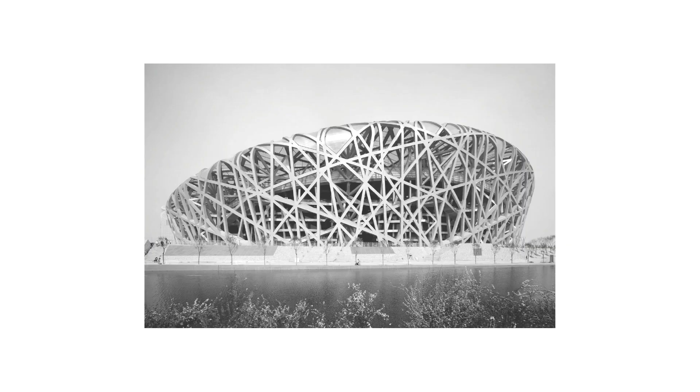2 trillion kilograms of steel are produced around the world every year, enough to construct 17,000 Bird's Nest stadiums, 31,000 Empire State Buildings, or 480,000 Guggenheim Bilbao skeletons. If all of this steel were to fill Central Park, this single ingot would be nearly 10 meters tall. If this steel were to wrap around the Earth, it would circle the equator more than 3 times.

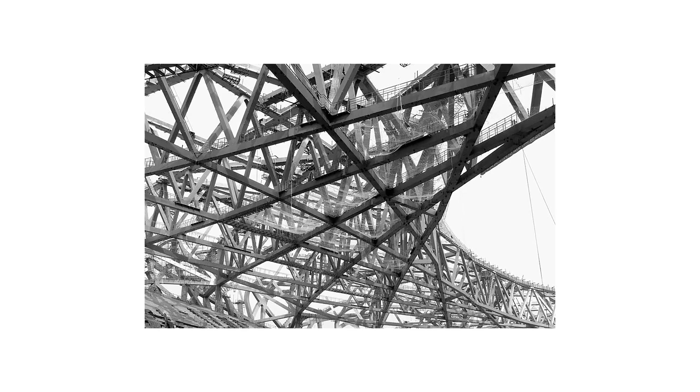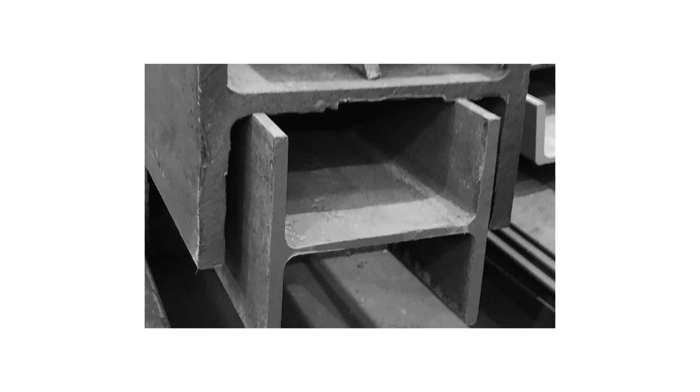Our thesis begins at this global scale, by exploring the complex networks in which steel is embedded. The goal of this project is not the impossible task of exposing every detail of these tangled histories, but to question steel's material dominance around the world. This investigation is conducted through the lenses of 3 steel beams. While these beams are unique in their constructions and their contexts, they are all part of the tangled web of

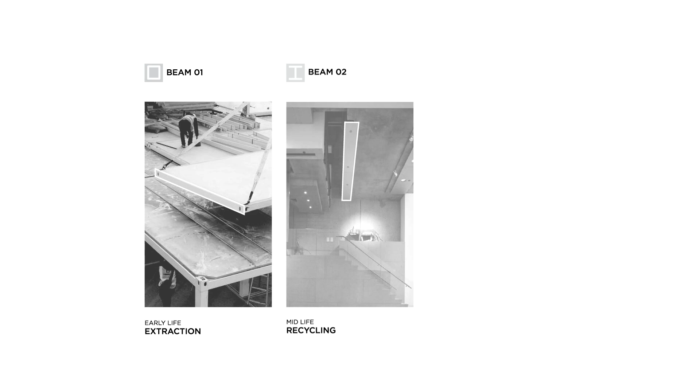steel. The first story foregrounds geological and geopolitical issues of extraction. The second explores low-carbon methods of production and reproduction. The third examines the human and economic costs of the steel life cycle. We combine methods from scientific research and scenario planning to develop a speculation for each story, all sited 50 years in the future. These scenarios expand beyond the lenses of their singular beams to explore the complex networks of our ever-changing and challenging environment.

GBT 16270 was an extruded steel frame in the Huoshenshan Hospital in Wuhan, China, constructed as part of the government's response to the COVID-19 pandemic. It formed one of the many prefabricated panels that supported the 1,000-bed hospital, one of hundreds of large-scale infrastructure projects that the Chinese government undertook that year. China alone accounts for 51% of global steel demand, producing 996.3 million tons of crude steel, or 0.69 tons per capita per year.

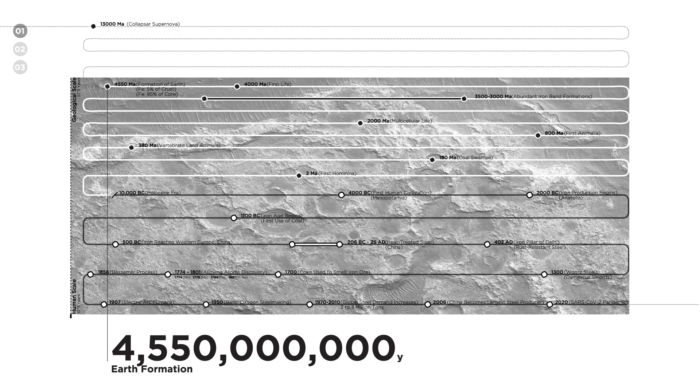16270 began a lengthy journey to unite itself 13 billion years ago, when a star 50 times the size of our sun collapsed. In the final hours of this supernova explosion, iron and carbon, the fundamental building blocks for steel and human life, were forged. 4.5 billion years ago, these elements were united with the formation of the Earth, but they were not so evenly distributed across it. Carbon, in the form of coal, is both an essential fuel and a key reactant in the fabrication of structural steel. In 2019, the steel industry accounted for 15% of worldwide coal demand.

2 billion tons of iron ore and 1 billion tons of metallurgical coal were used to smelt 1.7 billion tons of crude steel. By 2020, China had become the largest producer of coking coal in the world, generating over 4 billion tons per year. The coal for 16270 originated primarily in China's Haerwusu mine in the Inner Mongolia Autonomous Region, just one of the many water-stressed areas that supply 83% of China's growing coal demand. The remaining 17% originated in Australia, which supplies 55% of Chinese coal imports. Even before its formal creation, the raw material and power source needed to form 16270 had already traveled over 22,000 kilometers and passed through 5 customs checkpoints.

On a molecular level, 16270 crossed many more borders before it united in Wuhan. 6 months before the light gauge frame was formed, its backbone was extracted from the earth in the form of virgin hematite. The black rock was pried from a vein in Australia's Roy Hill mine, a minuscule fraction of the 930 million tons of iron ore that the oceanic nation produces each year.

Like most resources, 16270's ore moved along geopolitical channels. It was transported by BHP Group, one of the 4 companies that control 70% of the 2.35 billion ton global iron market. The ore was loaded onto a barge and shipped to China's largest port, the port of Shanghai. From there, the container was shipped 941 kilometers west down the Yangtze River. Finally, in the manufacturing center of Anshan, in Liaoning, 1 part iron united with 1 part coal.

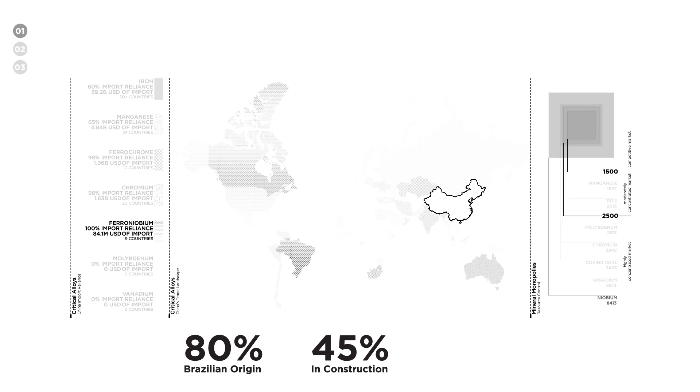45% of the world's ferroniobium is distributed across infrastructural and architectural projects, primarily in the form of HSLA steels such as 16270. The addition of just a single gram of this iron niobium alloy can reduce the weight of steel by 1 kilogram. In 2020, 16% of Brazil's ferroniobium mines were already under Chinese ownership. While the PRC could not yet geopolitically control all of the alloying elements of 16270, the superpower had begun to develop economic control of a global steel empire.

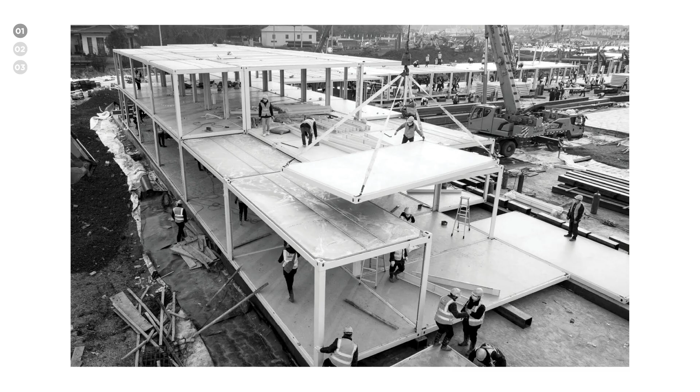After all of its molecules had been combined in Anshan, 16270 was dipped in a bath of molten zinc, searing its skin to protect it from oxidation. In Wuhan, cranes lifted it into the air, joining it to hundreds of other panels, a unitized system that would weather what would become a historic global pandemic. What would happen to the hospital in the coming years was, at the moment of its construction, unknown, but it was certain that global steel demand would continue to grow, and with it, a new era of territorialization.

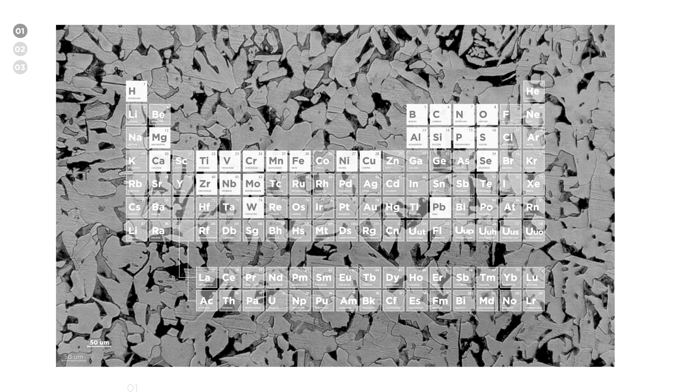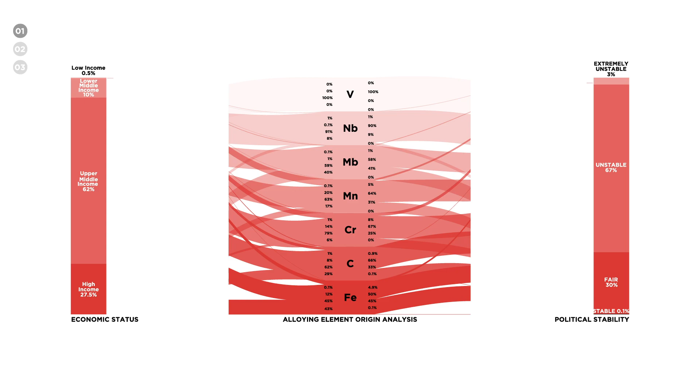Between 2005 and 2016, over half of Chinese international investments were diverted to energy and mining sectors in foreign countries. Sub-Saharan African countries attracted 1/3 of these funds. 500 of Chinese mining enterprises were in Zambia alone, where, since 2008, Chinese investors were exempt from local and federal taxes. Throughout the 21st century, China Baowu Steel Group Corporation Limited, then only the second largest steel producer in the world, continued expanding its empire. Fueled by fears that ore supplies would be exhausted by 2070, the conglomerate acquired 50 mines, supplying 13 types of metals and minerals around the globe. Eventually, the corporation amassed 99,000 square kilometers of land across 27 countries, a space the size of South Korea.

On January 19, 2050, the National Assembly of Zambia formally granted 7 coal mines across the country to Baowu. The terms of the 200-year lease allowed for the new enclave territory to maintain 99% of the resources and profits obtained from the land. The Steel Age had ushered in a new kind of geopolitics, one based on resource ownership and economic systems rather than territorial boundaries.

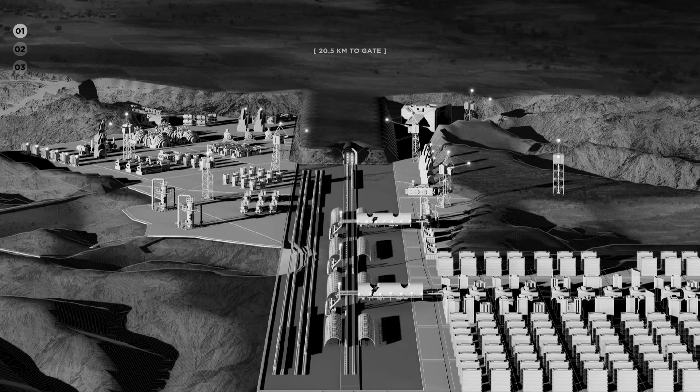In March of 2070, the Mamba mine, located just 10 kilometers north of Lake Kariba and adjacent to the small town of Sinazongwe, reaches its peak. Coal mining productivity has increased 30% over the past 5 years to 9.8 tons per miner per hour. In the sweltering heat of Sector 924B, nearly 65 meters underground, a metric ton of anthracite coal is extracted from the exposed seam. The coal is transported via conveyor to the adjacent processing plant, where it will be separated from rocks, dirt, ash, and sulfur.

Eventually, the coal will be loaded onto an automated tram, which will transport it 115 kilometers to the Choma distribution hub. From its incorporation in 2050 until present, Baowu has invested nearly $50 billion into infrastructure across Zambia, 90% of which exists within the boundaries of its own enclaves. The coal mined in this district will fuel Baowu's steel production, expanding the enclave into an empire. Once on the tram, the coal travels 20 kilometers north to gate D356 at the border between Baowu Enclave 03 and the Zambian Zimba and Choma districts.

Superficially, this boundary is intended to be fluid, constantly moving people and resources in and out of the enclave. The artificial line is demarcated on either side by a 1 kilometer wide uninhabited zone. But the land is far from empty. Almost immediately after the establishment of the UIZ, a series of informal settlements emerged to support the roughly 5,000 miners that would otherwise have to travel 50-plus kilometers into the district on a daily basis.

There's a tenuous standoff between the citizens of Baowu and of Zambia, a tense negotiation between economic investment and inequitable treatment. The UIZ is demarcated not by physical boundaries but by surveillance systems. A fleet of drones scan the area every 20 minutes, each drone ensuring, in 38.5 square kilometer increments, that the settlements neither formalize nor encroach on the official border.

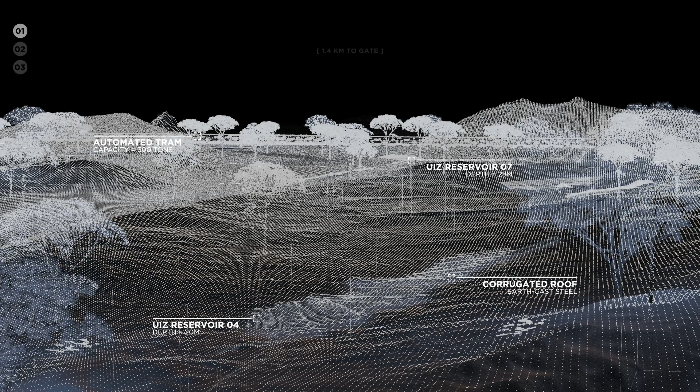As the cargo train rushes towards the Choma hub, it leaves behind a thick smog of coal dust in the air. In Sector 941C, before the dust can settle on the ground, it is captured by a screen network, rings of finely woven mesh that remove 85% of coal dust and sulfuric impurities from the air. From the aerial views of the surveillance drones, these circles simply look like outcrops in the landscape.

The netted zones, which capture 20 grams of pollutants per square meter, provide shelter from the environment of the mine and enable the growth of crops which would otherwise have withered in the polluted air. The mesh is supported by a lightweight steel truss. Paradoxically, it is still embedded in the system of production that it attempts to subvert.

The incorporation of Baowu 03 established a mining complex within an enclave territory, within a traditional nation-state, within a larger capitalist system. Vestiges of the enclave scar the landscape. The settlement serves as an informal critique of its autocratic government, of the proliferation of extractive landscapes, and of ownership of resources. As of 2070, there are still 200 years of proven reserves left in the mines. It is certain that the production cycle will endure.

These follies are crucial to the survival of the settlement, but they also act as monuments to the loss incurred by geopolitical, geological exploitation, loss of life, of landscape, and of culture. The projects are unique in program but united in typology, a series of architectural masks that obscure their true function. They employ the materials of the new age of empires in order to hide from the geopolitical processes that enable their very existence.

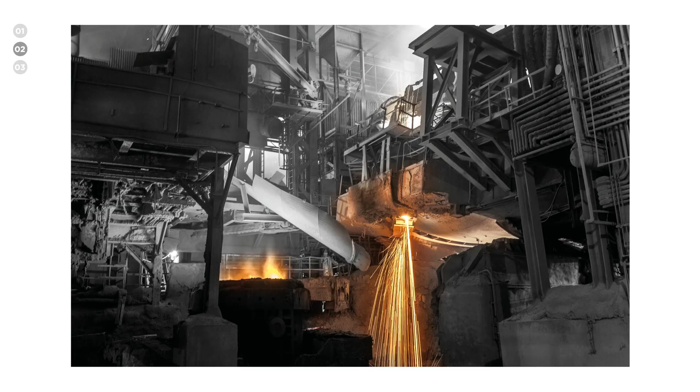A 992 was a custom steel H-beam in New York City's Fort Garr Museum. It supported the second-floor landing, providing visitors with a stable platform to view the museum's iconic bronze facade. The high-strength, low-alloy columbium-vanadium structural steel member was produced out of 3 flat-roll sheets welded together at ArcelorMittal's Coatesville, Pennsylvania factory.

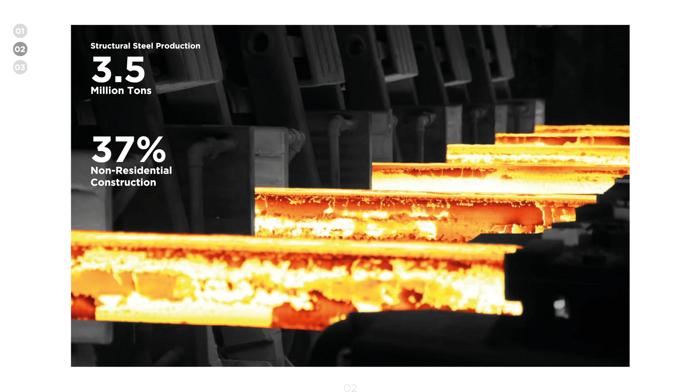The United States produces 3.5 million tons of structural steel annually, nearly 11 kilograms per person, in 12 structural steel mills across America's Rust Belt. 37% of all of this structural steel ends up in non-residential construction, like the Fort Garr Museum. On average, 69% or 61 million tons of US steel is produced from ferrous scrap.

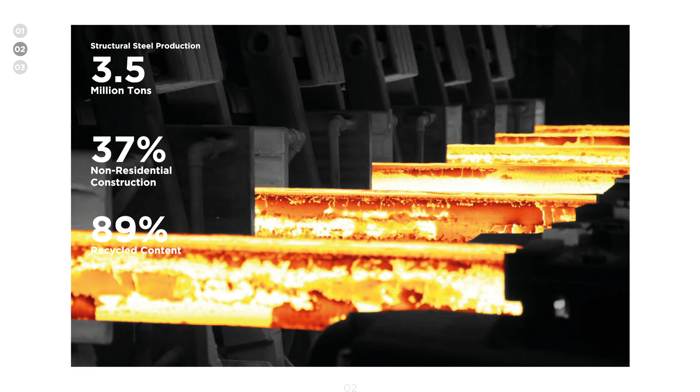Recycled content for the structural steel is even higher, at 89%, but there are still carbon costs to this low carbon method of production. A 992 had lived many lives before it was a beam. 80% of its composition came from ferrous scrap. The remaining 20% of its composition came from prime steel shavings brushed off a factory floor. All these fragments were fused together in the electric arc furnace in Coatesville, Pennsylvania, which processes 900,000 tons of steel a year.

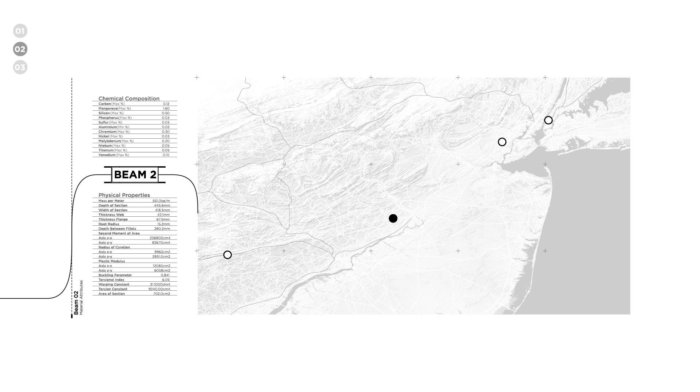Once A992 was fabricated, it was trucked to Eastern Steel Corp in Brooklyn, one of 35 steel service centers in the New York area. Over 70% of all the structural steel used in construction projects in the United States flows through some 1,120 service centers, which act as large warehouses.

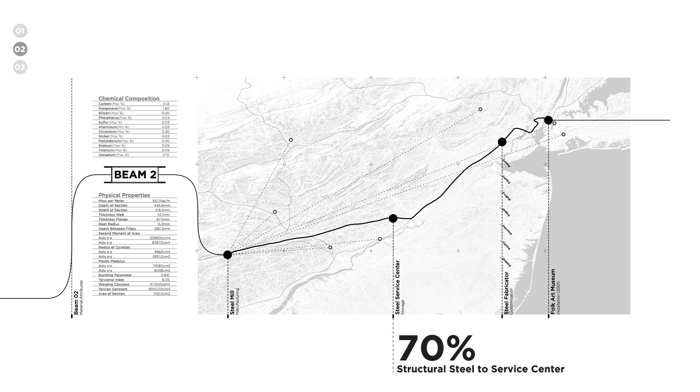After only a few weeks in the service center stockroom, A992 was cut to length and trucked to 45 West 53rd Street, Midtown Manhattan, where engineers estimated it was supposed to stay as long as half a century. But in 2014, A992 was moved yet again.

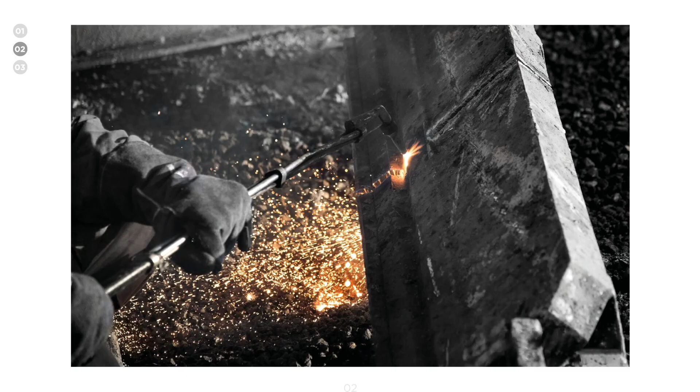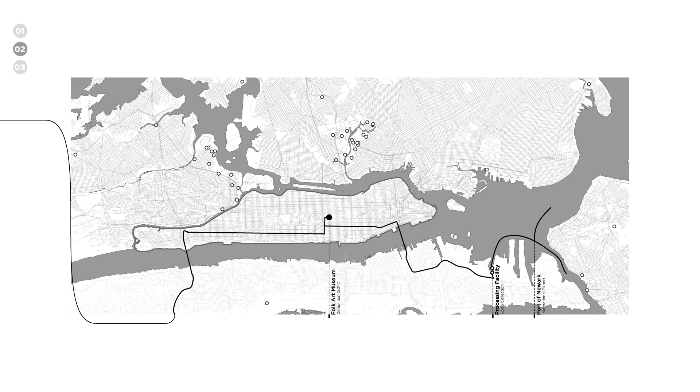New beams arrived to support scaffoldings for workers to painstakingly dismantle the bronze facade panels. Oxyacetylene torches and reciprocating saws descended on the skeleton of the museum, severing A992 from its cross-bracing members. The remnants of the museum were loaded onto a flatbed truck and delivered to a metal scrap processor in Jersey City. A992 had become one of the 2.4 million tons of steel waste that New York City generates every year.

Of the 100 tallest intentionally demolished skyscrapers in history, 23 are in New York. 60% of them were steel structures. They lived for only 41 years, while the average lifespan of structural steel is 52 years. A992 lived to be 13.

Even after just 13 years, the alloys that constituted the complex specification of A992 were lost. The beam was simply dragged to a scrapyard, where it was stripped of its cultural and technical identity. A992 would live again, but only after the wholesale destruction of its inherent self. Even in its diminished form, A992 remained a commodity.

The 3.3-ton beam was just a fraction of 3.8 million tons of steel scrap that the US shipped to Turkey each year, over 30% of US scrap. HS 720449 was melted down in an electric arc furnace owned by the Habas Group, one of the largest steel scrap producers in Turkey. The alloying atoms that had imbued A992 with its strengths were now considered toxins, too volatile

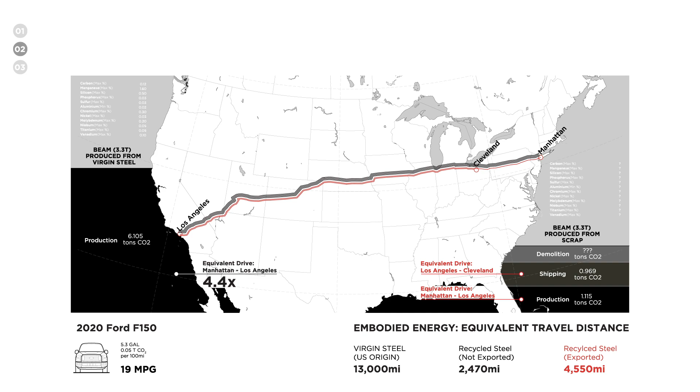A992 was reincarnated many times, sometimes before the end of its designated lifespan. It likely traced and retraced its steps many more times beyond what is outlined here. A992 weighed only 3.3 tons, a fraction of the 87.9 million tons of steel that the US was producing per year. Steel was lauded as being 100% recyclable, but moving even this comparatively small mass accrued a heavy carbon cost across the many thousands of miles it traveled in its life.

By 2020, half of all waste generated in New York City annually, roughly 6 million tons, was construction and demolition debris. In order to be recycled, steel was shipped to scrap processors and transport stations where it lay in wait for the highest bidder. Like A992, many pieces of structural steel traveled the globe to find a new home, a new economy willing to mass-produce large amounts of low-quality steel.

In the continuous reforging that followed, they were doomed to lose the precious alloys for which so many landscapes had been mutilated. In order to build upon the city's 2020 goal to eliminate landfill waste within the next 30 years, the New York City Council enacted a radical piece of legislation. Bill S9502 banned the export of waste beyond borough boundaries, to take effect by January 2040. Manhattan, which generated astronomically more waste than it received, was disproportionately affected.

By 2070, Manhattan had become the new epicenter of urban recycling. At 0100 hours, a shadow passes over Bryant Park. An exoskeleton winds its way up the W.R. Grace building. Manhattan's latest rezoning has spelled certain doom for the iconic structure at 1114 6th Avenue, which will be the 27th mid-century building to be demolished in the last 3 months.

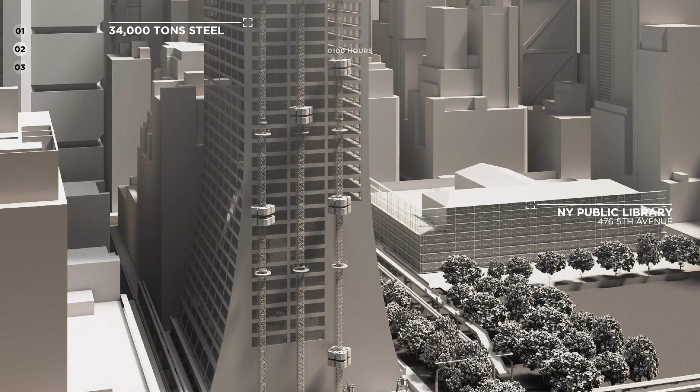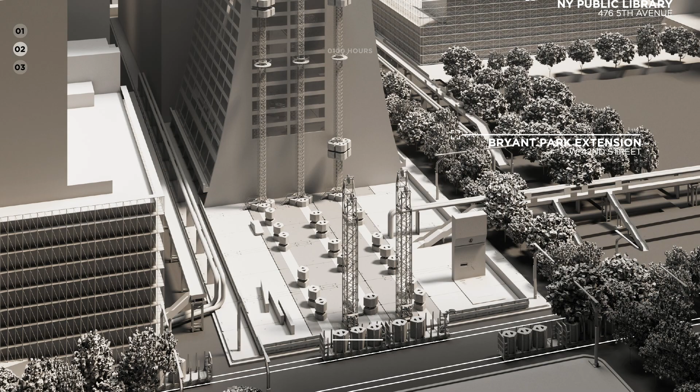In the early hours of the morning, robotic claws rip the building limb from limb. Curved and straight steel beams land on the back of a waste hauler, operated by one of the city's 250 public waste contractors. On this crisp March morning, over 1,200 haulers are roaming Manhattan's even-numbered avenues, blanketing the peninsula in a barcode of alternating pedestrian and supply thoroughfares. As the hauler continues up 6th Avenue, beam C-17 jostles against an old Bertoia chair.

After 40 minutes, the beam has reached the midpoint of the 47th Street Canal, one of 6 water wasteways that cut 10-meter horizontal bands across Manhattan. Canal 47 begins at what was once the headquarters of the former United Nations, now the site of Amazon's 4th New York office. The waterway continues west through Hell's Kitchen, a 3,700-meter-long connective sinew between the residential and corporate neighborhoods. During the day, the area is a hub of pedestrian activity. Noise floats down from the roof terraces that form the extension of the High Line. But it is past the 10 p.m. curfew. The 602 digital turnstiles will not scan pedestrian access codes until the sun rises.

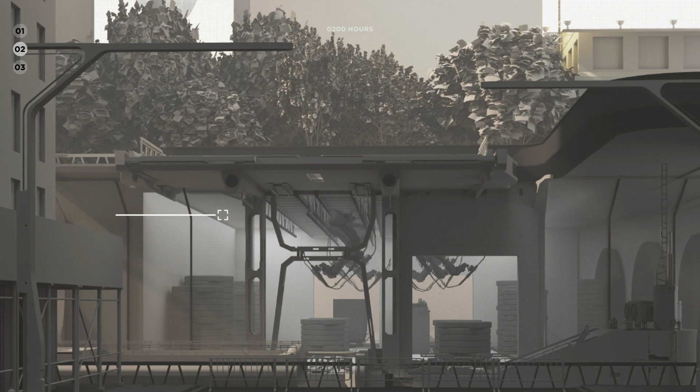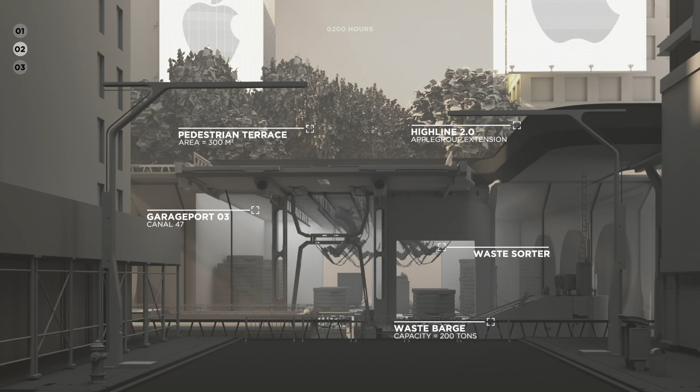At 0200 hours, the hauler docks silently at one of the 8 garage ports on the south side of the canal. Under the terrace, and under cover of darkness, 28 tons of waste from the Grace building are sorted by material. 60% of the waste is structural steel, to be classified as either reuse or recycle, and then loaded onto a color-coded barge that will travel west towards the Hudson River, the southern artery of the wetwork. The 100-foot barge is just one of dozens, a parade of segmented bodies dotting the green water of the canal.

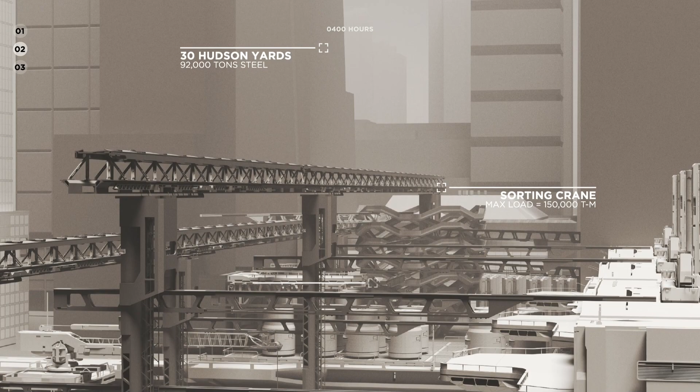At 0400 hours, a crane lifts a 2020 Toyota Camry 200 feet into the air. It was among the last private vehicles to exist within the city. The car is loaded onto the vessel, now a self-sustaining sorting facility that processes 28,000 tons of waste every day. Industrial jaws tear doors from chassis, limb from body, continuously deconstructing the object as it travels 16 stories down the gravity-fed honeycomb. Robotic arms sift through the pieces of flesh, sorting them according to size and material.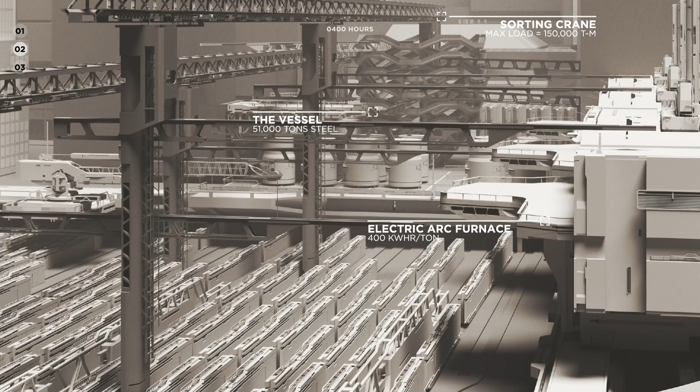In the steel section of this forensic lab, a small piece of the Camry's shell is extracted and inserted into the Tesla mass spectrometer, where it is analyzed for its molecular composition. 6 centiseconds later, more claws grab the shell and divert it to one of the 452 conveyor belts radiating from the lab. The shell lands atop the frame of a forgotten treadmill and the 4.8-ton beam C-17. While distinct in form, these three artifacts are nearly identical in chemical composition. C-17 then passes over 30 active tracks at Hudson Yards to arrive at the electric arc furnace. Once nothing more than a parking lot, the 2.2-acre site has been transformed into Structure Inferno. Today, along with 120,000 tons of steel, the beam will be reborn again and again as the city relentlessly melts and remolds its steel.

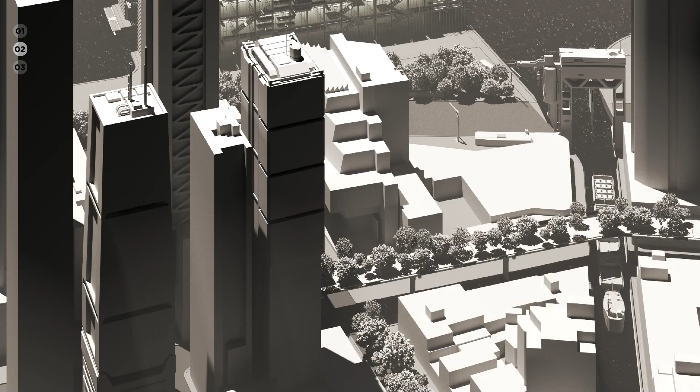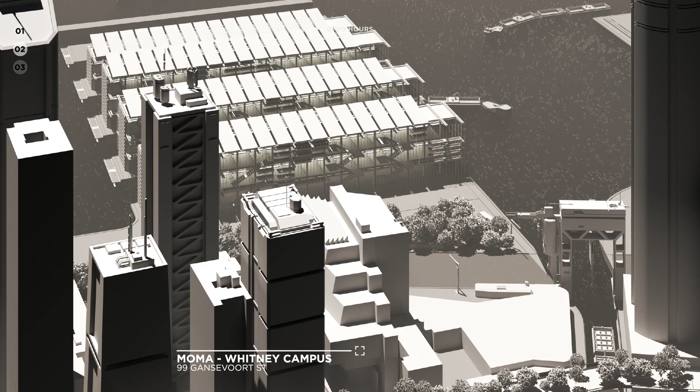0700 hours, a container vessel docks inside a warehouse at Pier 53, one of four 500 square foot holding pens for fresh steel. The steel is sorted according to composition and form, and stored in this climate-controlled facility alongside overflow art storage for the former Whitney Museum, which was acquired by MoMA in 2047. An automated system continuously evaluates the accessioning and deaccessioning of steel. A new H-beam is rejoined by a forebear, one that was allowed to bypass the furnace. Only a slight color difference indicates their distinct path.

This morning, 8,293 beams stare out at the river, at a grid of vortex turbines that populate the Hudson, energy slaves to the 400 kilowatt-hour per ton furnace. The beams are protected from the corrosive air by the warehouse's synthetic skin, stretching over a screen made from 12,000 recycled steel rods. Soon, this steel will be called upon, dragged back to the water, to serve the counterclockwise cycle of unbuilding and rebuilding in this mega metropolis.

By 0900 hours, a steel barge passes under the bridge at 61st Street. The bridge is a twin of that at Canal 47, Manhattan's answer to repairing its 100-year-old infrastructure. Each bridge is part of a recognizable set with bespoke connections to the existing buildings that support it. Simultaneously unique and generic, this replicable structure will save the city nearly $50 billion over the course of the next century.

Technically, these net zero processes are considered green, and in 2080, the peninsula is designated the first ever LEED Palladium city. In 2020, the story of a single steel member is told over the course of a decade. By 2070, the reincarnation of a single steel member has been compressed into a single day. Manhattan is now the epicenter of an epidemic of melting and remolding steel.

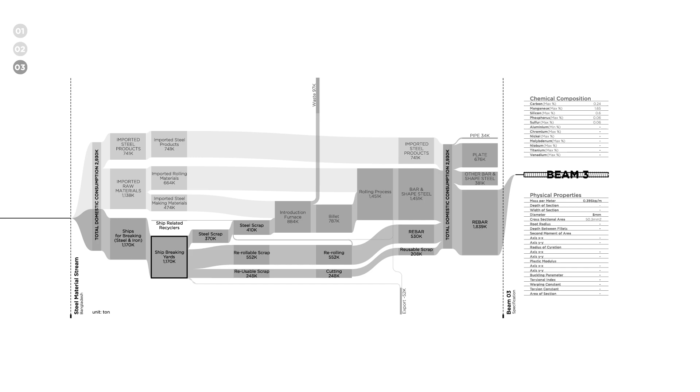The Ferrous Steel Corporation was just one of 148 registered shipyards in Bangladesh, all of which were located on the 19-kilometer-long Sitakundu Bhattiari coastal strip in northern Chattogram. It was from this 4,000 square meter space, which generated 60 to 80% of all the steel supply in Bangladesh, that 1499 would emerge. Like 45% of all container ships, the Eurus and 1499 would be reincarnated as rebar, encased in a concrete sarcophagus.

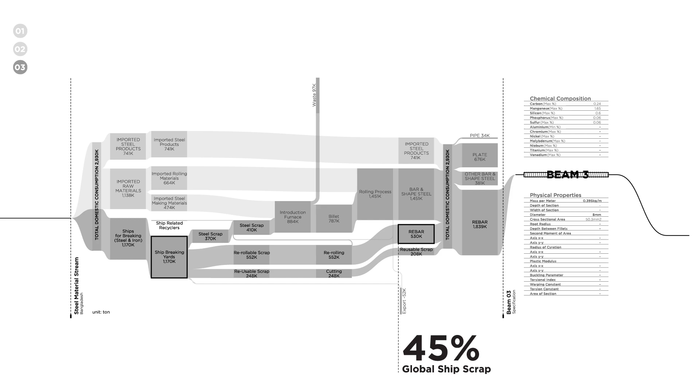Of the 45,000 ocean-going ships in the world, approximately 700, or 1.55%, are taken out of service each year. At 16 years of age, the Eurus was nearing the average lifespan of a container vessel, and, as the cost of insuring and maintaining the aging steel ship mounted, its value shifted from the goods it was carrying to the steel body of the vessel itself.

At 246,000 tons, the same ship, which sold for almost $46 million in Bangladesh, would have fetched only $29 million in Turkey and $21 million in China. This discrepancy was due to the minimal infrastructural requirements, cheap labor, and high demand for recycled steel in a region with virtually no iron ore reserves.

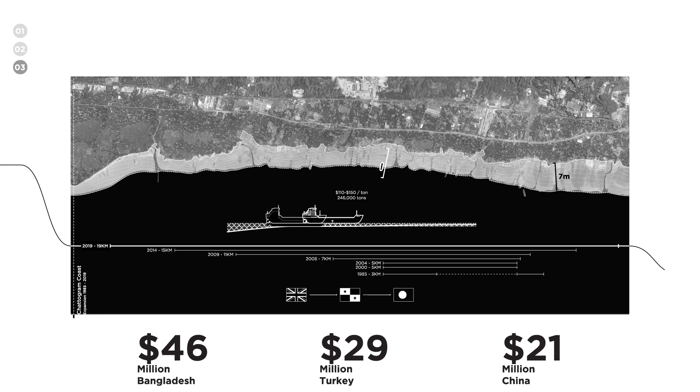When waters rose with the spring tide on March 10, 2012, the Eurus's berth would signal its death. The massive tidal range of Chattogram, nearly 7 meters, allowed the ship to beach itself without the use of elaborate and expensive dry docks. The ship had a dead weight of nearly 250,000 tons, 95% of which was steel. But this steel was coated with 50 tons of paint containing lead, cadmium, organotins, arsenic, zinc, and chromium.

Breaking a ship the size of the Eurus would flood the ground with 240 tons of molten steel. In the same process, roughly 5 tons of paint would be burnt in open air. Throughout its tenure, the Eurus had carried not just cargo, but 7.5 tons of asbestos and 881 tons of residual oil. This was just a fraction of the 79,000 tons of asbestos, 69,200 tons of toxic paints, and 240,000 tons of PCBs that Bangladesh was estimated to have imported between 2010 and 2030 in the form of decommissioned ships.

Once beached, oxyacetylene torches dissected the Eurus's body, dividing it into truckable parts as demanded by their purchasers. Mechanical cranes lifted heavy equipment such as boilers, motors, capstan stockings, while human arms carried metal plates, bars, or pipes to nearby stack yards. These arms were just some of thousands, between 22,000 and 50,000 direct laborers, and 100,000 and 200,000 indirect laborers, who were employed in the Bangladeshi shipbreaking yards.

Here, on the shores of the Chattogram district, without respirators, helmets, or even shoes, workers endured risks ranging from toxic gas explosions to falls from the upper decks as high as 70 meters. Hatches contained flammable and explosive gases during cutting. Tubes carrying oxygen lay unprotected underground, vulnerable to falling objects and sparks from cutting torches.

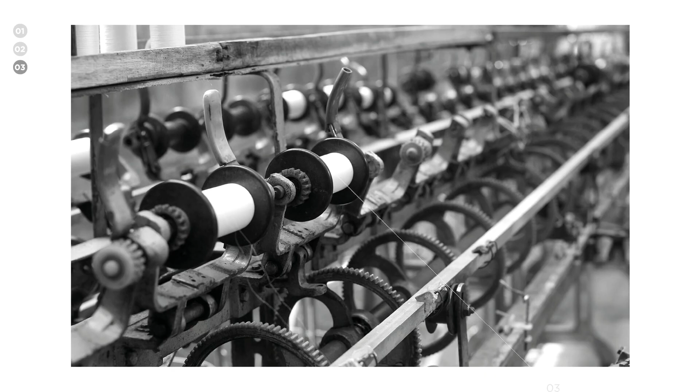The severed steel plates were shipped to one of 350 re-rolling mills along the Dhaka-Chattogram highway. Eventually, they made their way to Abul Khair Steel, the largest of the 9 sheet steel manufacturers in Bangladesh. The pieces were of high enough quality that they did not need to endure the heat of an electric arc furnace. Instead, they were sheared to size and reheated through a simple coal-fired furnace, and eventually rolled into reinforcing bars, including 1499. 1499 claimed thousands of lives by the end of its own.

On April 24, 2013, the 7th floor of the 8-story Rana Plaza garment factory began to crumble. When the overburdened and structurally unsound garment factory ultimately collapsed, it killed over 1,100 people. But the cost of reclaimed steel is undoubtedly much higher. In 2019 alone, 26 workers died, while over 150 were officially reported to be injured in the Bangladeshi shipbreaking industry.

Shipbreaking was responsible for the extinction of 21 fish and crustacean species, and the endangerment of 11 other species in the region. An estimated 60,000 mangroves were cut down in the 14-kilometer stretch of coastline near Chattogram, leaving the coastline vulnerable to typhoons and floods. Shipbreaking was a paradox for the region, both an economic lifeline and a literal death sentence. This relentlessly degraded steel was part of a consumer cycle that valued economic consumption over human lives.

By 2020, over 1.7 billion people were part of the consumer class, a group characterized by the accumulation of non-essential goods like those produced in the Rana Plaza factory. 90% of the world's trade was carried by sea on over 60,000 merchant ships. Global seaborne trade volumes exceeded 10 billion metric tons at an estimated 53.6 trillion ton miles. After a 2018 agreement by the International Maritime Organization, 170 member states agreed to reduce their greenhouse gas emissions by 50% by 2050. But the efforts to green the shipping industry were countered by an already fatigued planet.

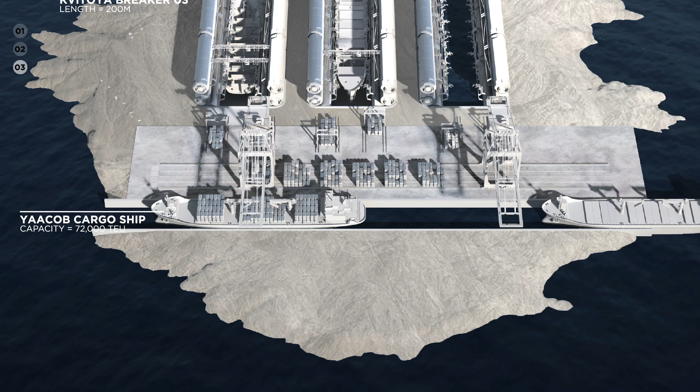At 8 a.m., the Lovecraft docks in the Kvitoya Ring, which scans the vessel and calculates precise divisions in its formwork. The ship is then conveyed to one of 3 200-meter-long automated shipbreaking jigs. A swarm of robotic claws descend upon the ship, dismembering it according to the specifications demanded by the ring. The claws work non-stop in the freezing air and through the polar night. In only 4 days, the Lovecraft is completely dismantled. At precisely 8 a.m. on January 7th, an automatic alert dispatches a cargo vessel to Kvitoya, where it will be loaded with 640,000 tons of waiting steel. This deconstructed steel will be sold and shipped according to global demand.

Kvitoya processes nearly 100 ships per year, almost 10% of the global total. Technically, the island is still uninhabited, a paragon of environmental stewardship and laborless industry.

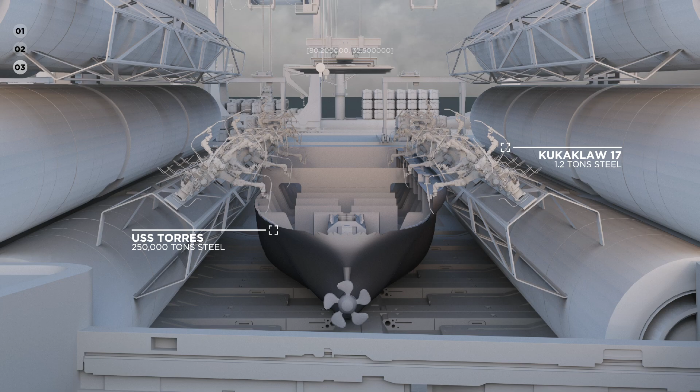72.3, -157.6 degrees. 3,300 kilometers across the Arctic Circle is the Chukchi Sea, where an artificial archipelago marks growing territorial claims in the region. Rising waters and changing coastlines have exacerbated territorial disputes in the 200 nautical mile exclusive economic zones in the Arctic Ocean.

In this space between the United States and Russia's Wrangel Island, the -1.6 degree water is dotted with ships, a stationary fleet that every day pumps 200 tons of sand from the ocean floor to supply the expanding atoll. 2 to 3 ships the size of the Lovecraft will pass through this water, murky with sand plumes, every year. US government subsidies will lead them to the shores of the Utqiagvik archipelago, where they will be broken and rebuilt into the fabric of the islands themselves.

The steel extracted from these vessels supplies critical infrastructures to remediate oil spills, rescue damaged ships, and combat human trafficking in the region. But these islands are benevolent only at face value. Increased traffic has spurred increased pollution and disruption of the natural environment. Rather than recycle, the archipelago relies on external resources to survive, importing nearly $17 million worth of food and fuel each year.

70.5, -21.9 degrees. The environment is changing in many ways above the 66th parallel. At Ittoqqortoormiit, on the east side of Greenland, the bay is now subject to disastrous storms and unusually high tides that occur as often as 20 times a year. Increasingly, ships are driven aground on the rocky coastline. When shipbreaking supply outpaces demand, these vessels are deemed irrecoverable, doomed to weather the harsh Arctic elements for eternity.

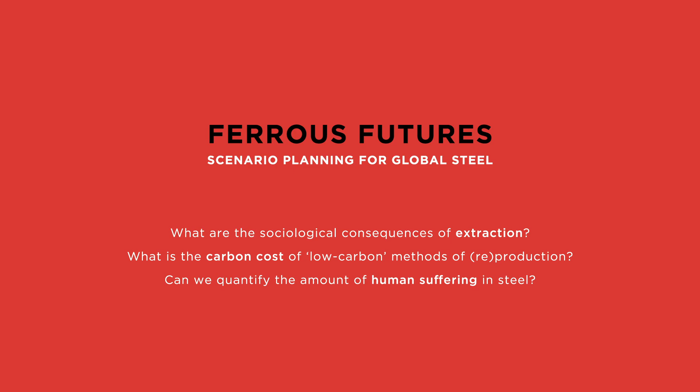The scenarios we've outlined today acknowledge that extraction is not just a geological, but a geopolitical concern, that our current recycling practice is driven by capital rather than climate, and that life and livelihood is the true cost of consumption. They begin to investigate the spatial outcomes that might arise from an alternate approach to steel resource control, waste streams, and consumer culture. As populations grow and urban centers densify, so too will our material dependence.

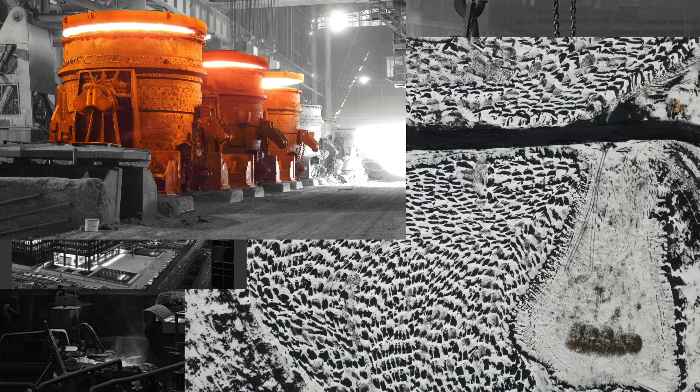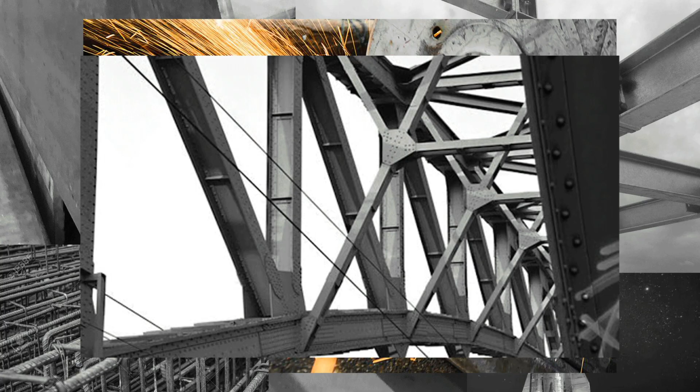These three scenarios provide plausible futures that operate within the confines of the current capitalist system. They highlight the absurdity of our current practice without becoming absurdly unrelatable. The goal of scenario design is not to produce an alternative material, but to question the consequences of our current practice, while acknowledging that we, as designers, operate within a larger geopolitical context.

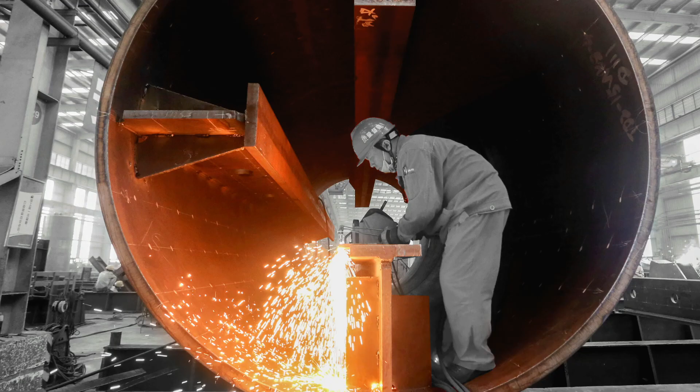While there are many disciplines involved in the global steel industry, architecture is still culpable. At 56%, the built environment is the single largest consumer of steel. In imagining these scenarios, we reconstruct our material culture and the effects that these speculations might have in the complex networks in which this material is embedded. They allow us to prepare for the future by providing a context for speaking about the unspeakable. While this thesis questions the pervasiveness of steel in the built environment, it is our hope that this reciprocal research design methodology could be expanded or applied to other issues of global complexity.